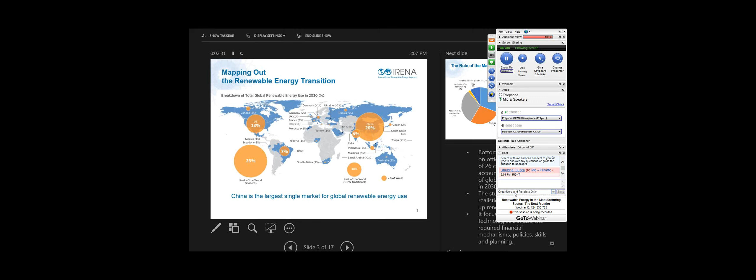Then the next step, what we did is we asked in each one of those countries national experts about what are the additional potentials for renewable energy technologies, and we then calculated those costs. What we realized then was that if you calculate those costs, you can actually double the share of renewable energy globally in a cost-competitive manner.

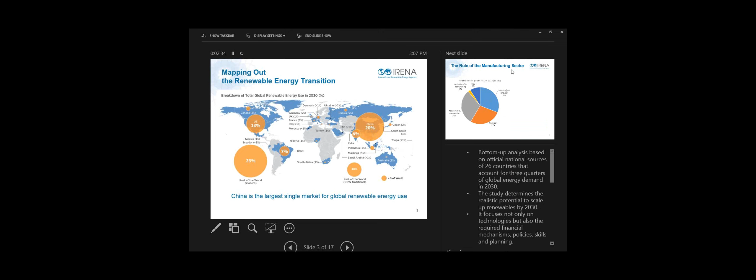The orange circles here indicate where these potentials for renewable energy deployment lie. They lie, interestingly, in areas where you also have a lot of manufacturing. So in China, in the US, and in Europe.

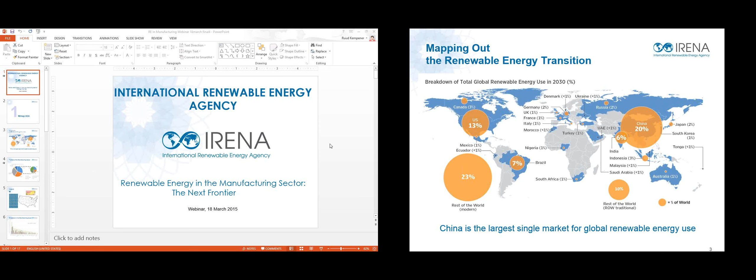So looking at the manufacturing sector in more detail, we can here see the breakdown globally of energy consumption. And the industry sector accounts for about 1/3 of global energy consumption.

Around 60% of this energy consumption lies actually in non-OECD countries. So this is outside of Japan, Europe, and North America. For example, China accounts for about 30% of energy demand globally in the industry sector.

Another interesting factor is that 70% of the energy consumption in the industry sector comes from process heat, another 20% from electricity, and then around 12% which is used is oil, which is used as a feedstock to produce mostly chemicals.

If you break that 30% of energy consumption further down, you can see three big users of this energy. First, the iron and steel industry with 25%, then the chemical industry with about 13%, and then what is called the non-metallic minerals, which is mainly cement, around 12%.

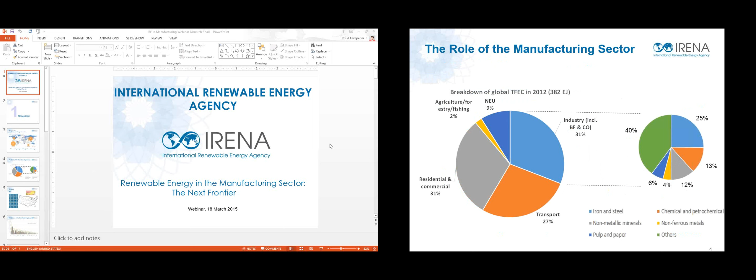Before continuing to the next slides, I briefly wanted to put these figures in perspective. So I just showed that global energy demand is around 380, say 400 exajoules globally. So if we're talking about 1 exajoule, and we'll talk about 1 exajoule in the next couple of slides, we're actually talking about a unit of energy consumption which is similar to the total energy consumption in a country like Austria. Now, the biggest consumer in the world is the United States, and they have around kind of 60 exajoules. So I'll refer to these exajoules in my next slides.

So what came out of this analysis is really an analysis for the industry sector. Now, this slide shows the share of renewable energy in the industry sector in the 26 countries that we analyzed. So from left, you have the countries with the highest shares, to the right, the countries with the lowest share. Now, there are two important aspects to look at in this slide.

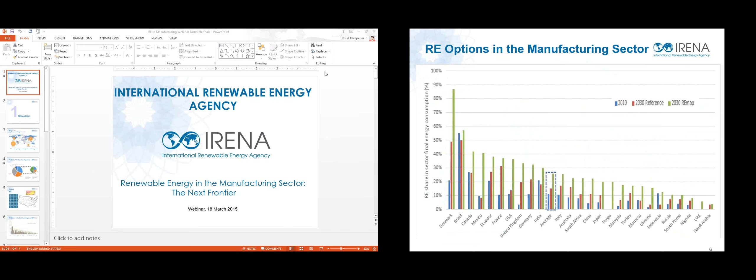First of all, the blue bars are the current share in each one of those countries. The red bars are the shares which would be achieved if they implement all of the national renewable energy plans. And the green bars are the share of renewable energy which would be achieved when we implement all of the options identified by the national experts.

Two important things to realize. First of all, except for Denmark and maybe France, in many of the countries, the blue and the red bars are a similar height. Essentially, it means there is little in the national energy plans which look at the industry sector. And the second important aspect is that the green bar is much higher than those two others, so there is significant potential to increase the share of renewable energy in many of these countries.

So this also becomes evident if we look at it at the global sector.

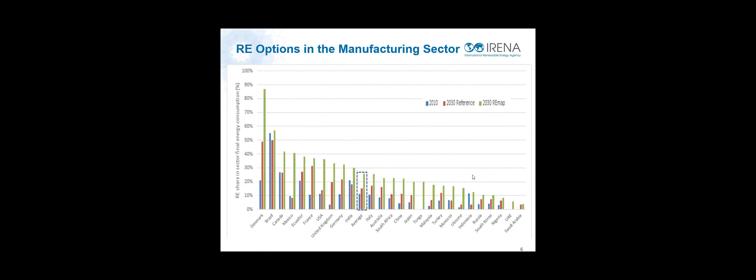At the global average, which is also in the middle, we see that around 8 to 9% of the renewable energy share of industry is renewable energies. If we include the renewable energy which is produced by renewable energy power sources, so for example hydropower,

electricity use in aluminium smelters, the share would increase from 11% today to about 15% in 2030, according to national energy plans. However, if you look at the green columns, the potential for renewables in the industry sector could actually be doubled, especially on the heat side.

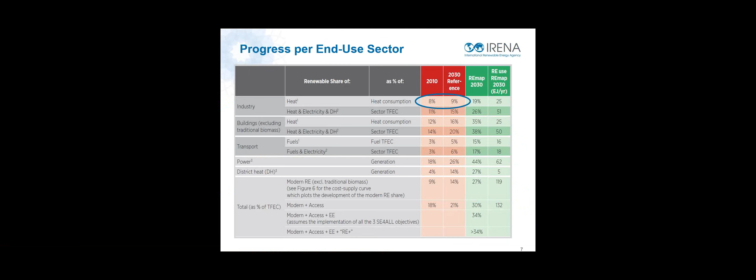So now the main question is, how could we realize this potential? And secondly, are there any additional potentials, or are the additional potentials identified by the national experts realistic? In the next couple of slides, I will give you some insights from a detailed study, which is available now, that we conducted to examine the renewable energy shares in the sector.

First, let me talk a little bit about the methodology which we've used. The methodology consists of essentially 3 steps. First, we looked at the projections of industrial energy use between today and 2030.

We broke that down into low, medium, and high temperature processes, electricity demand, but also demand for feedstock. So that's again the oil for chemicals. In this sector, we also looked at the potential for energy efficiency and incorporated that into our analysis.

So we found that if the industry follows best practices, we could save around 40 exajoules of energy consumption by 2030. This is kind of equivalent of the 40 Austrias, which I mentioned before - 40 times the energy consumption in Austria.

In the second step, we looked at the costs. So we looked at an assessment of what are the gas, oil, coal, and also biomass prices in 2030.

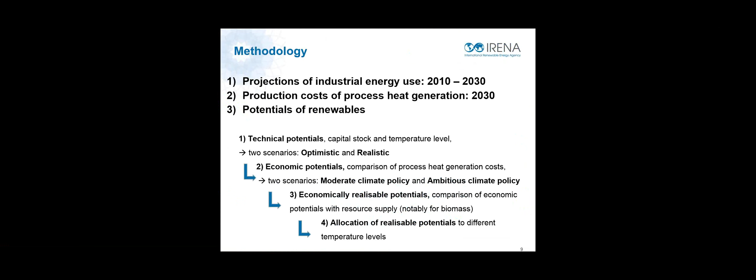So what came out of this analysis for the industry sector? This slide shows the overall results. As I discussed previously, we're mainly using biomass today, and the national experts identified already about 15 exajoules of

additional renewable energy options in the industry sector. Now this detailed bottom-up analysis actually identifies that there is even further potential there.

Another 2-3 exajoules if we take the most negative assumptions, meaning essentially that oil prices will be relatively low, there will be no carbon pricing, and biomass will be very restricted. But there could be another 11-12 exajoules - again, 11 or 12 times the energy consumption of Austria - available if we would have carbon pricing in place and biomass resources are available for the industry sector to use.

So in the next couple of slides, I would like to break this global result down a little bit further.

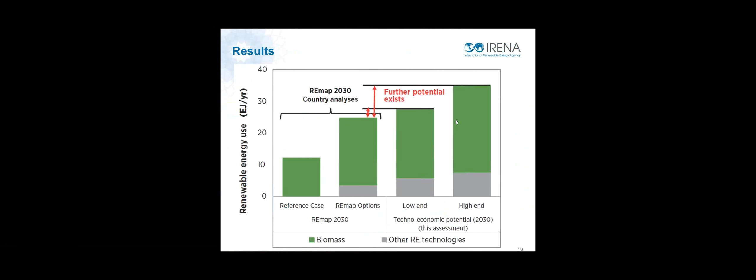First, we quickly want to have a look at the results per technology. This shows the potential of the renewable energy technologies which are realizable.

We looked at 4 renewable energy options: solar thermal, heat pumps, geothermal, and biomass. Then we looked at whether these technologies can be used for low, medium, or high temperature, and their potential in retrofit versus new capacity builds. Each bar shows different renewable energy technologies and in which energy sectors their potential lies.

The graph shows that for biomass, the highest bars, there is the largest potential. Even more than 6 exajoules of potential for biomass in high temperature applications, around 7 exajoules in medium temperature applications, and around 6 exajoules in low temperature applications. Then there's another 2 exajoules of biomass potential to be used as feedstock for the production of plastics and other chemicals.

For solar thermal capacity, another 2 exajoules of potential is available for low temperature heat, especially in the buildings of new industry capacity. Essentially, if you're building new factories, you could integrate these solar thermal technologies into the design of your factory and then use it. However, there's also about half an exajoule of solar thermal potential to retrofit it, essentially build it on top of existing industry plants.

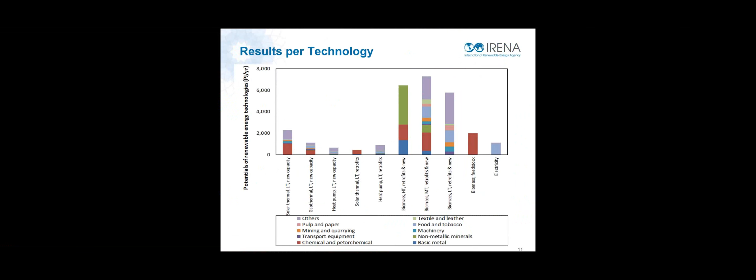We also looked at the deployment of these technologies per region. Now you see the technologies are the colors, and the different bars are the different regions. The 2 regions with the highest potential are North America and China. China, of course, is a big manufacturing hub, so there's a lot of energy demand there, which means there's also a lot of potential to use renewable energy technologies.

In North America, there are many existing manufacturing plants, but quite a few of them come to the end of life in the next 10 to 20 years. That means that if you're going to replace some of these factories, you can already start integrating renewables into the design of these factories to provide process heat.

After my speech, we will have some presentations from representatives from India, Europe, and Africa. You see that in each of those regions you have a potential of up to around 3 exajoules of renewable energy options in the industry sector.

The other element to discuss in this particular graph is, of course, the color. As you can see, and as we explained previously, a lot of the renewable energy options are biomass based. That's all of the green which we can see in this particular chart.

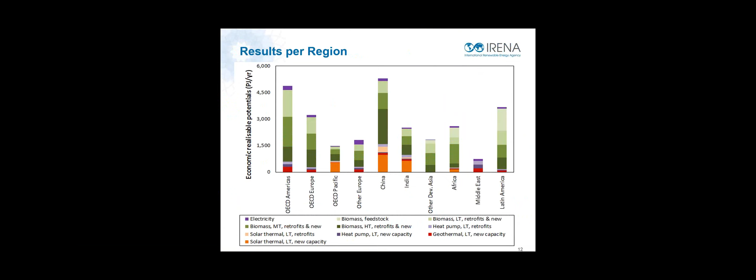We've also looked in more detail at the potential for renewables to be a feedstock for the production of materials. These materials could be plastics, but they're also being used to create fibers to produce clothes or bottles. Now, this is already happening today.

These cost figures show that the cost of producing bio-based ethylene, one of these feedstock products, is already competitive with fossil fuel-based ethylene production, especially in India and Latin America. Production is already taking place, for example, in Brazil and India today.

Another product is methanol, also one of these chemical commodities used for many different applications. There too we see that the costs for producing bio-based methanol are slowly coming into range with the cost of fossil fuel-based methanol. So there are a lot of opportunities there. These are discussed in 2 separate technology briefs which IRENA produced in January 2013, which are also downloadable from our website.

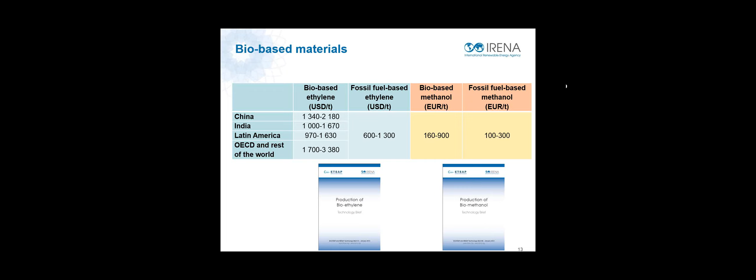So what does it all look like if we add up all of these renewable energy options together? This is quite a complicated figure, but I'll try to explain it simply. On the x-axis you have the renewable energy share in the industry sector, and on the y-axis you have costs, the substitution costs. Essentially, any options above 0 would be more expensive than conventional technologies, and any options below 0 are cheaper than conventional technologies in 2030.

You also see 3 cost supply curves. On the left-hand side you see the gray line. Each of those graphs starts around 10%, which is the renewable energy share we would have in 2030 if we only look at the national energy plans. The endpoint on the right-hand side shows where you would end up if you deployed all options.

Any time we talk about the economic realizable potential, we simply follow this line up to the point where it hits zero—up to the point where these renewable energy options are cost effective.

Now if we assume there's going to be no carbon prices, that the oil price is going to be very low, and the biomass is mainly used for biofuel production in the transport sector or for the generation of electricity, you can see that the cost economic potential, in the gray line, is only a couple of percentage points.

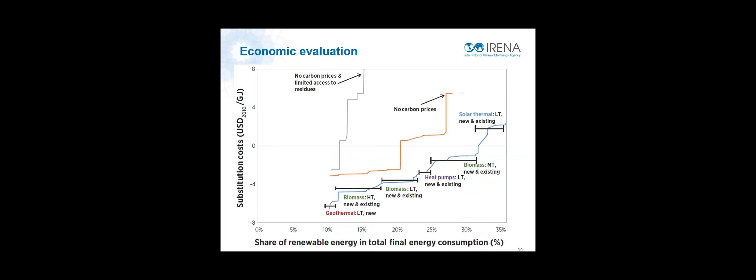So now that we know there's a lot of potential for renewable energy in the industry sector, what shall we do? What should policymakers do? What should industry do? This analysis was combined with a number of workshops which we organized, for example in Brussels and one in India, where we got from industry experts and policymakers some qualitative insights into what is needed in this sector.

So we came up with 6 points, 6 areas where we think more action is needed to deploy renewables. One of those is the energy-intensive sector—the big chemical plants—which consume the majority of energy consumption in the industry sector, but there are only a limited number of those plants. So looking at how you can integrate renewable energy technologies in these plants will be able to address a lot of this potential.

The second area where we think more work is needed is the renewable energy potential in small and medium-sized enterprises. There are two important factors there. First, small and medium-sized enterprises account for more than 90% of all industrial plants—so these are many, many small users. And by starting to deploy renewable energy in this particular sector, you also create a lot of awareness about the possibilities.

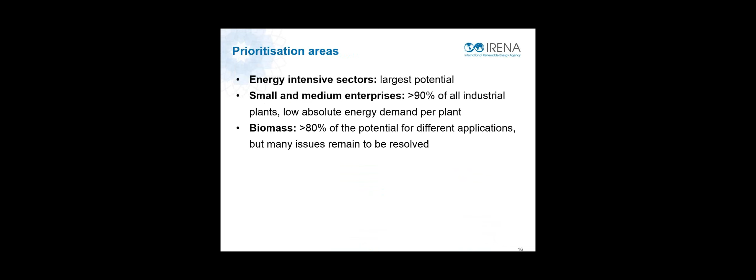The fourth area is solar thermal systems. We've recently launched some technology briefs on the potential of solar thermal for industrial applications, and it has been confirmed afterwards that there's really a big shift in the last couple of years to new markets for these solar thermal applications in Latin America and in Asia. We think more deployment is needed and can be done in these sectors.

The fifth area is electrification. The share of electricity in the industry sector is relatively low compared to heat demand. However, there are a couple of big processes, for example the production of aluminium, which require a lot of electricity. So there's a big potential there, for example, to locate those aluminium plants next to hydropower plants. Another area, maybe further into the future, is 3D printing, where you use electricity to produce products—again an option to use renewable-based power to help the manufacturing sector.

Last but not least, I think it's very important to look at the regional aspects. How can renewable energy be deployed in China versus Africa versus Latin America? Each of those regions has different characteristics, and I think by pooling the resources in these countries together, we can come up with innovative and effective policies to deploy renewables.

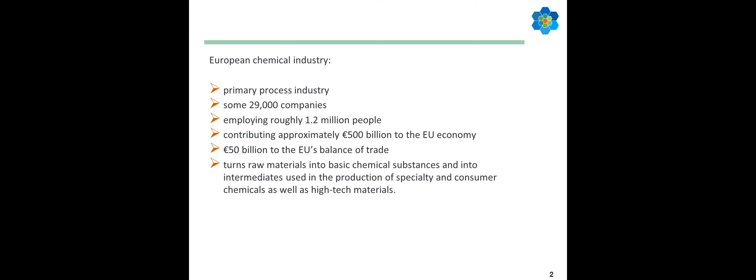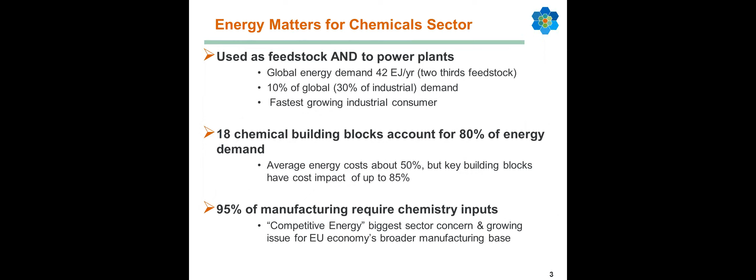The interesting element in talking about energy is that there are some 18 chemical building blocks that account for 80% of the energy demand of this sector. And that is why some of the building blocks have an average energy cost of about 50% of total manufacturing costs, but it can be up to 85%. So energy costs are enormously important for this sector. But the sector is also enormously important for any other manufacturing sector, so we can proudly claim that some 95% of all manufacturing is using our products in their products.

Now, what I would highlight, having listened to Ruud before, of course, there is capacity in using more renewables in the chemical industry. However, we always look at it from an economic side as well. As I explained before, energy accounts for a large part of our production costs, so it has to be competitive. And all the potentials that Ruud has presented, well, I have really the question to Ruud and to others in this call: is this really realizable?

Is it realistic? When we talk about availability of biomass, for instance, are we talking about biomass produced in the vicinity of the country or the region that we look at? Or are we trading here globally? Are we assuming that lots of imports are happening? That would be necessary in the case of Europe.

The graph I show you here is that of the use of biomaterials in the process and in the chemical industry as such, and the shape of the arrows show the size of the inputs of these raw materials in the chemical industry. So lots is coming from refineries, inorganics, from natural gas, coal mining, and there is a thinner arrow that indicates bio-based materials.

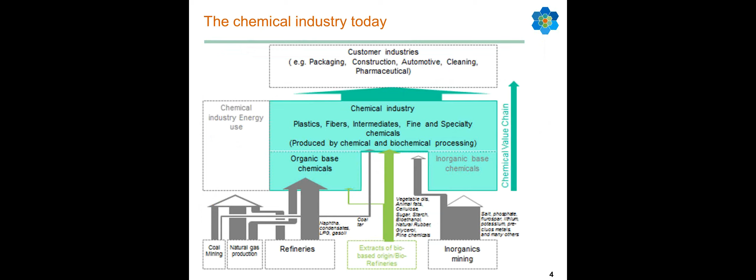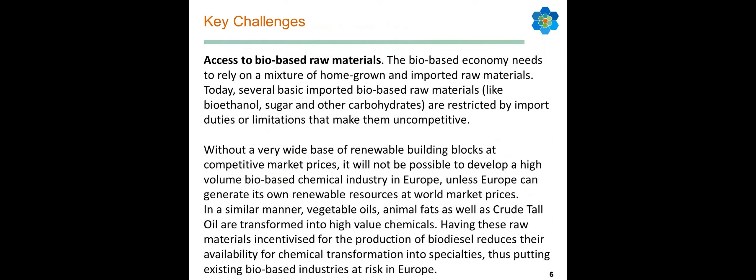And there is, as Ruud also indicated, a challenge to integrate these products, these materials into current processes. You mentioned retrofit opportunities.

I am aware that this is enormously expensive, so ideally you talk about new capacities. Again, there is a challenge in Europe because new capacities are being built currently to a large extent outside of Europe, namely in the US and in China and in other parts, Middle East, other parts of the world.

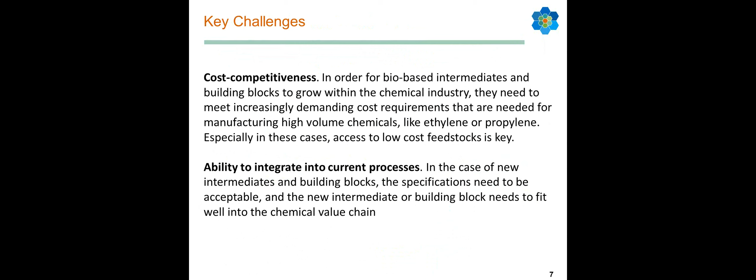So then there is a challenge where materials fight for higher value streams, where we are exposed to market forces. And indeed, I can support Ruud by stressing what industry needs is a stable, coherent, predictable framework, a regulatory framework, which makes investment feasible. And indeed, investments are needed, also in the European chemical industry, to make use of renewables, either as energy source or as feedstock source.

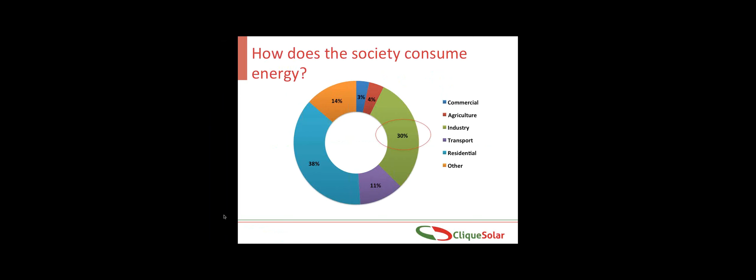A large part of the energy consumed by any society is attributable to the industrial sector. The figures shown here are for India. These will vary by country, but the story will remain the same. This energy is in the form of electrical and thermal. In the industrial context, majority of the energy is in the form of heat or thermal energy, which is required in the various manufacturing processes.

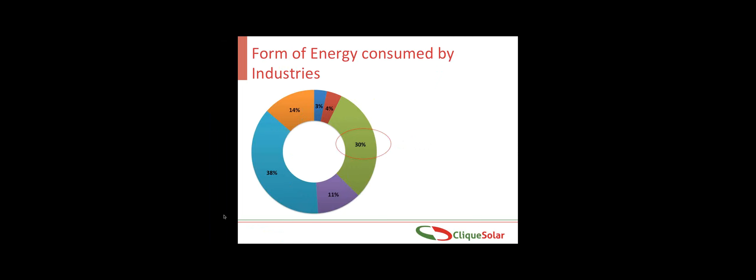Up till now, this thermal energy has been provided by burning coal or various forms of biomass, or in many cases by burning oil products. Each of these sources have their own limitations due to either the environmental impact they have, or their availability, or increasing cost. Solar technologies have been technically and commercially proven to provide this thermal energy and can play a significant role in reducing the dependence on these conventional sources.

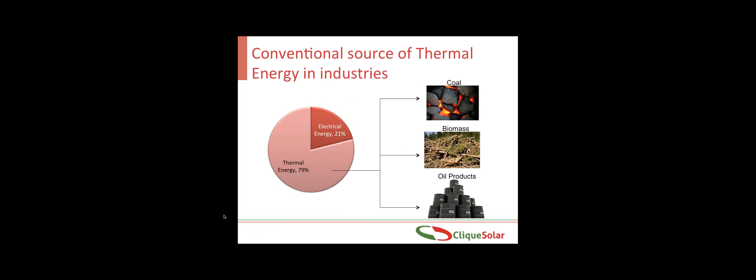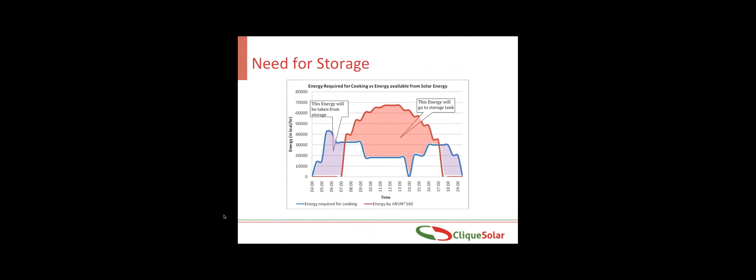A common constraint in solar is where demand for energy doesn't match the supply. Mass cooking is a very typical example. In such cases, short-term storage can be provided. I will not go through the schematic in detail as it is available for you for view later.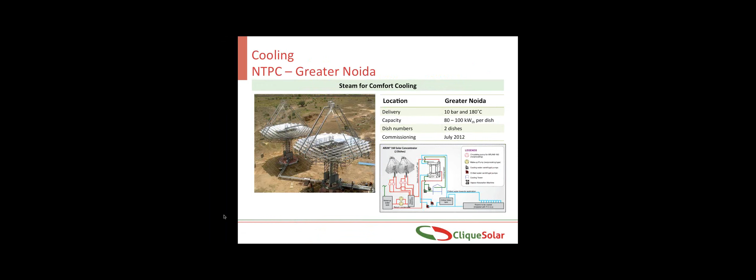This is for NTPC for comfort cooling at one of their office spaces. And this one is at one of the more revered religious places in India for mass cooking for the devotees' food.

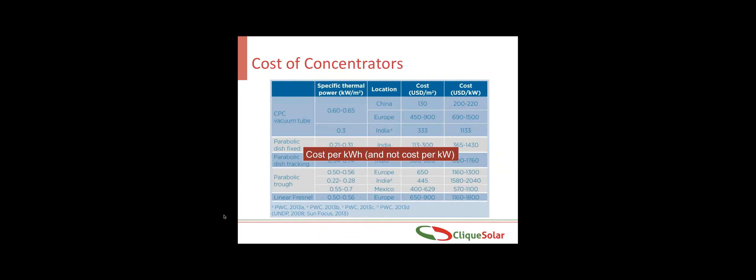Although solar thermal technologies have been in existence for over a decade now, the adoption has not been very widespread. The barriers range from lack of awareness amongst top management, which are the decision makers, to the lack of standardization of materials and components, resulting in a very poor ecosystem. Space requirement to cater to a meaningful percentage of energy consumption is quite high. The initial investment is high and the payback periods are still longer than what industries expect.

Lastly, it is still a government incentive dependent industry, at least in India. Government policies play an important role in proliferation of these technologies, and some of the policies become a hindrance rather than promoting the sector.

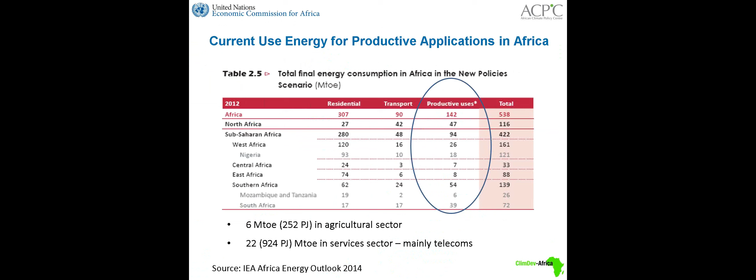So some examples of energy use and the potential for renewable energy substitution. This is based on work that we did when I was in IRENA on renewable energy for productive uses in Africa, and the full report will be available in the next few months on the IRENA website. For example, cement production is a huge energy consumption area in Africa, but there is potential to go up to 50% or even more. Some companies are using large hydro, and this type of sector would actually function more on grid-connected large hydro systems.

Similarly, for aluminum, again, very high energy consumption. Say, for example, in South Africa and Nigeria, the main energy sources are coal and gas. In Cameroon, for example, it is hydropower. And again, there's a huge potential there for substituting the fossil fuel sources with renewables. But there's very little potential for small-scale renewables.

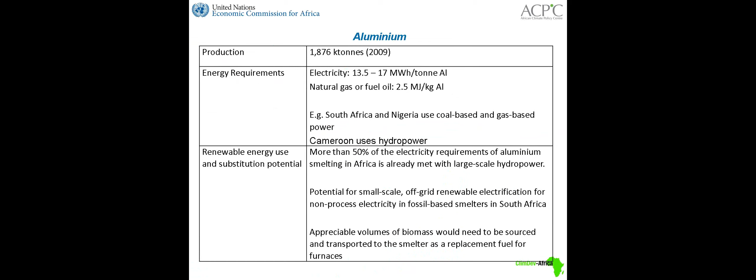And again, biomass, as Ruud mentioned in his presentation, is very, very important. He mentioned the availability of biomass. In Africa, we have plenty of biomass, so there's a huge potential for how we can sustainably use biomass in industry. And for sugar, tea, coffee, and so on in the agro sector, again, huge opportunities for use of biomass, especially residues, bagasse, and biofuels.

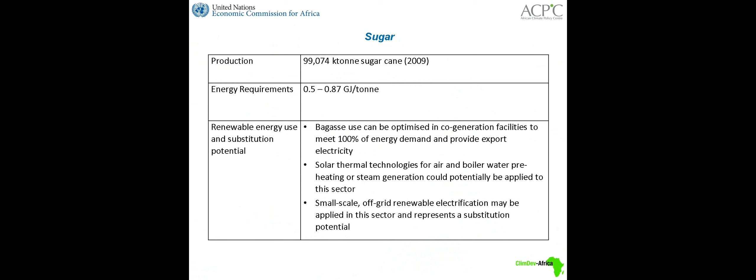As an example of such a situation, we have a company in Kenya that produces 60% of the sugar in the country. It produces all of its energy from its bagasse. It exports 25 megawatts into the national grid. And so it shows a business case of how companies in Africa can use renewables for productive uses.

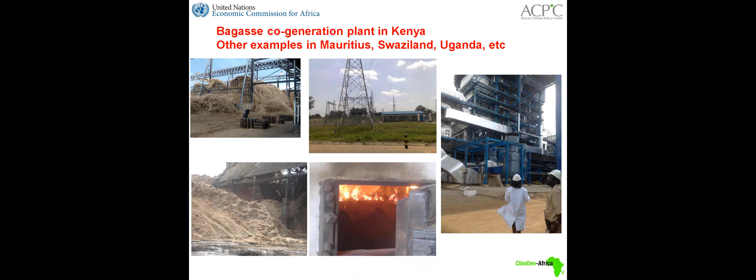Ruud mentioned the issue of replication. This is a clear example of how much replication can happen here. As I said before, Africa's economy depends hugely on the agro sector. So there's a huge potential for renewables, for productive uses, and a huge potential for replication.

So going forward, the African Structural Transformation Agenda is going to drive how renewables are deployed in the continent, particularly in the industrial sector, because as I said, the continent is now trying to push for value addition in the case of mining, in the case of agro-processing, but there are also opportunities for energy efficiency improvements in industry, but the awareness needs to be promoted, and policymakers need to make the right policies and bring incentives so that we can mainstream low carbon.

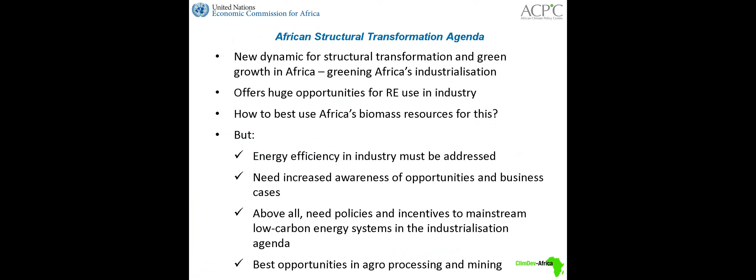In fact, the UNECA, our organization, in the Mineral Development Center is already developing regulatory framework guidelines for countries on how they can mainstream low carbon in the mining sector. So over a period of time, this will become a requirement, and so huge opportunities exist in this area. But across Africa, as I said, there are huge opportunities which are still not yet being tapped, and therefore the opportunity for replication and scale up is really, really huge.

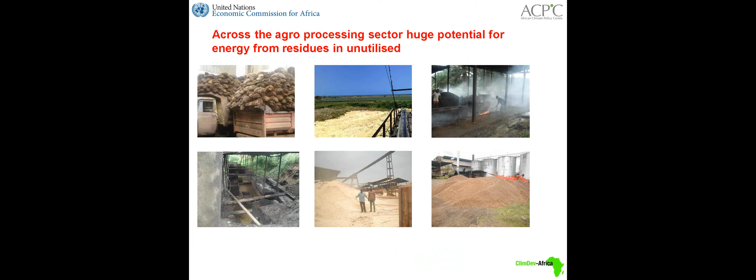Peter mentioned in his discussion the lack of access to residues. In the concept that Ruud was presenting, there was a huge assumption on whether there will be availability of the biomass. In Africa, we don't have that problem, so we have huge opportunities for renewables in industry and for productive uses. So to conclude, there is a large potential in Africa for renewable energy for productive uses. We saw the number earlier, 5 exajoules of total energy. The share of renewables there is very small, but the potential is very high.

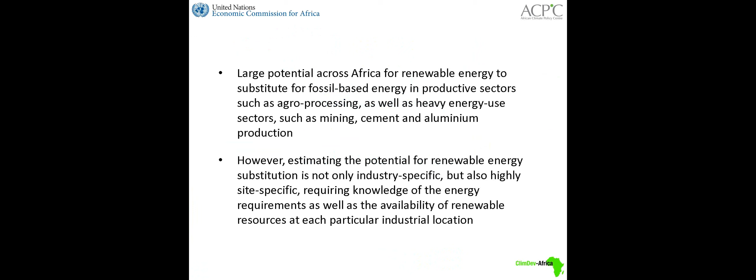But we have issues of data. We have to figure out how to better capture the data situation in Africa. So Ruud talked about the REMAP project, and the UNECA is going to be collaborating with IRENA to scale up REMAP analysis in Africa, and that will help us, together with our statistics division, to improve the data situation so that we can better optimize the opportunities of using renewables in industry in the continent.

But the few heavy industries that we have would obviously always depend on grid-connected hydro resources, again, of which there are many in Africa, and an IRENA initiative called the Clean Energy Corridor. We have other initiatives, the Africa Power Vision, that are promoting renewables. If we were able to tap our renewable resources, then Africa's industry could be powered almost entirely from renewable sources, thereby achieving the green economy drive that African governments are pushing for now.

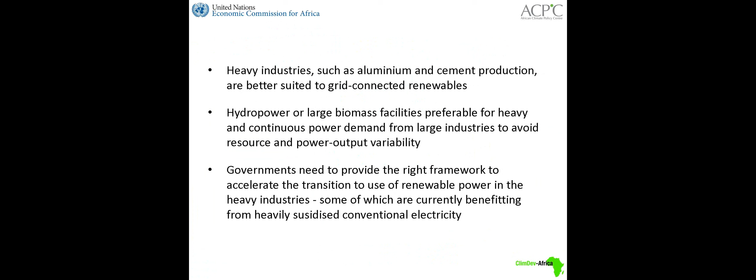But the government needs to provide the right framework, the right incentives, so that these initiatives can take place, and also so that business opportunities can develop in scaling up the opportunities that are there but are not being utilized. So, as I said, the main sectors there would be the agro sector and the mineral sector.